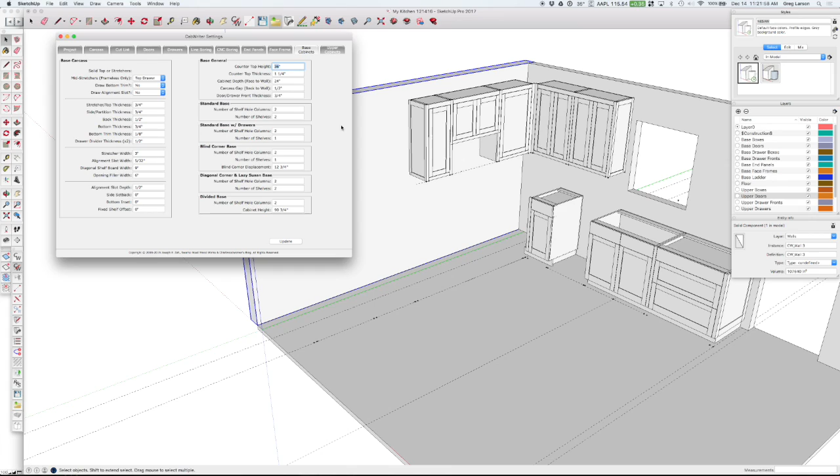I'm going to draw it as a base cabinet, and we're going to make it a bit higher. So let's make it like 48 inches tall, but we're only going to go 14 inches deep. So I've got a line 14 inches out here. Let me just draw a quick cabinet, and we're going to make this a left end panel, and this one we shall make a right end. Let's just make it a right end sheet for fun.

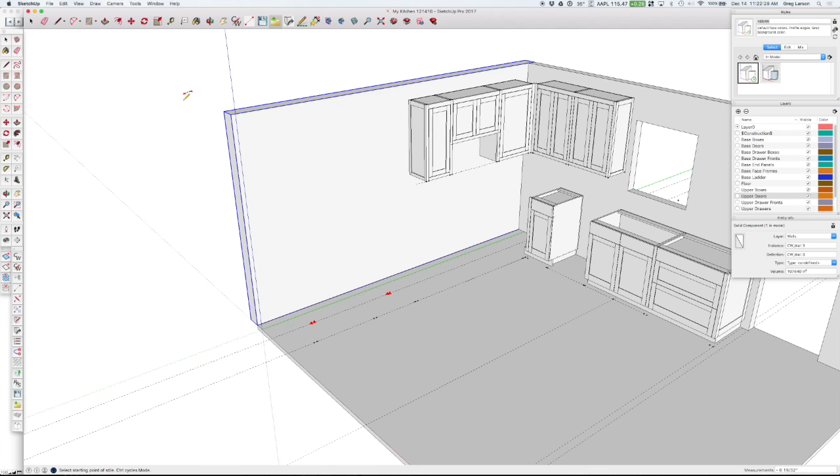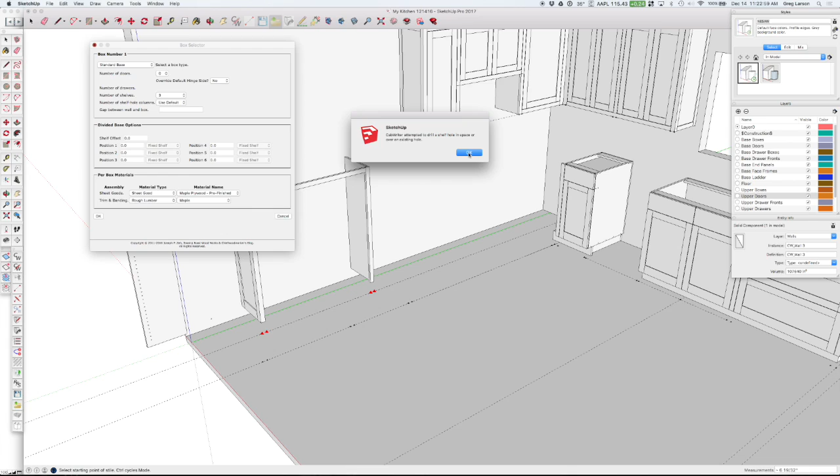So a piece of plywood, and so we'll create the cabinet. And I'm going to just do a standard base. I don't want any drawers or anything in there. Obviously no doors. And we'll use 3 shelves and the default shelf hole columns. And it's telling me I attempted to drill a shelf hole in space or over an existing hole. So I think I need to go look at my drilling tab.

I'm going to just undo that. Put my right end sheet back there. So let me go here, and we're doing line boring. If I look, my back row reference point for the line boring is off the front edge and 517 millimeters back. That's deeper than our cabinet. You can look at the drilling video if you want some more detail on this,

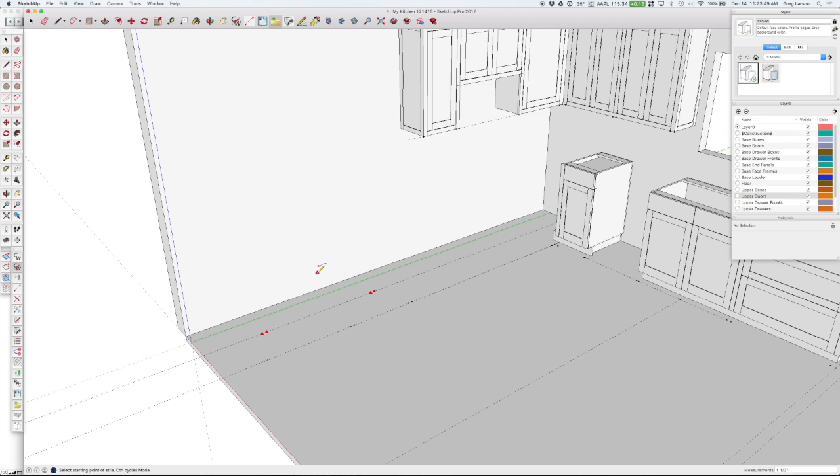but I'm going to go off the back 37 millimeters. That way, no matter how deep the cabinet is, I'll get a row of shelf pin holes at the front edge, 37 millimeters in, and 37 millimeters in from the back edge. So I shouldn't have a problem drawing it this time. Standard base, 3 shelves, no doors. All right. So there's a basic bookcase, and we notice we've got our shelves, we've got our shelf pin holes, and so on.

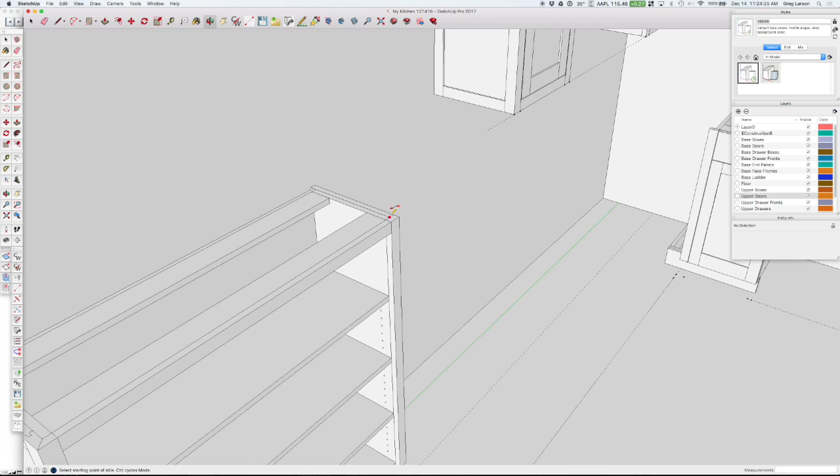But if you see here, my stile is lined up flush with my interior cabinet side. Normally I like that, especially if I'm putting drawer slides or hinges on, because that will allow me not to have to build out for those items. But on a bookcase where this is open, sometimes it can be really hard to line that up perfectly, and since it's always visible, you'll notice it. So what I like to do is put a 1/8 inch overhang of the stile to this cabinet side.

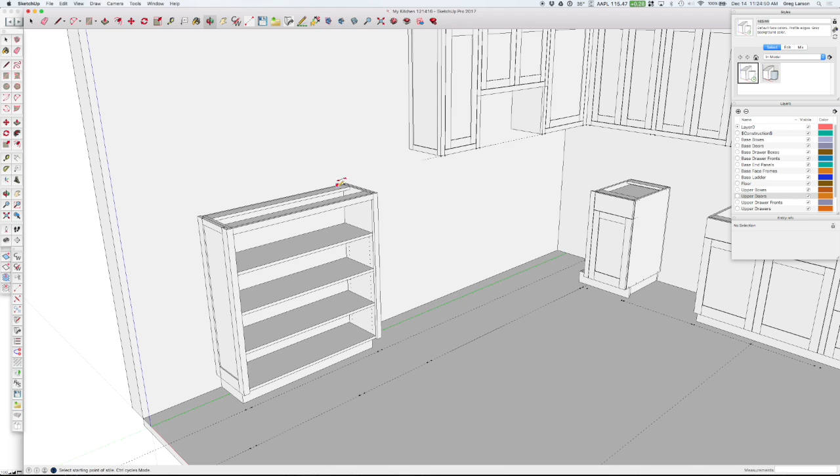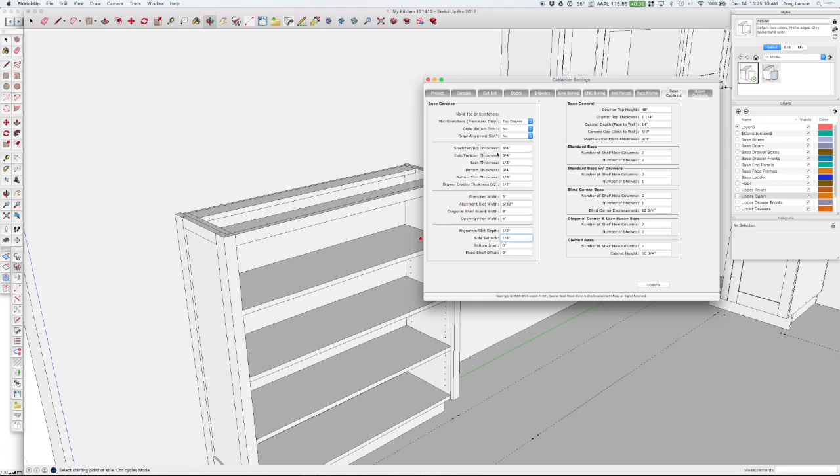So what do I need to do? I need to go into my settings. The first thing I want to look at is on base cabinets, the side setback. So what I want to do is set the side back 1/8 of an inch from the stile edge. So let me redraw that cabinet. So redraw the selected cabinets. No, do not use the stored defaults since I changed something. And if you look here, I do have an offset now. Here's the edge of the stile, and here's the cabinet side. That's 1/8 of an inch.

But you can see I got a different problem here. Since my side panel is still 13/16, and I've got a 1 9/16 front stile, that was enough. 3/4 of an inch here, 13/16 here. That added up to 1 9/16. That worked well when this was flush. Does not work so well now. So I either need to make my cabinet side thinner, but then I'd have to get 5/8 plywood, which I can do. I have a setting for that. But the easier thing would be just to make this end panel 1/8 inch thinner.

So I can go back into my settings. Under end panel, there is a setting here for frame thickness. So if it's a frame, I've got a setting, so I'm going to make that 11/16. And I've got the same problem over here with my sheet, but my sheet was only 3/4 of an inch. So now I got to use a 5/8 sheet there. So that could be a problem if I needed to get 5/8 plywood. That would probably be a frame and panel anyways, or another cabinet. But for illustration purposes, we'll see what this does for us.

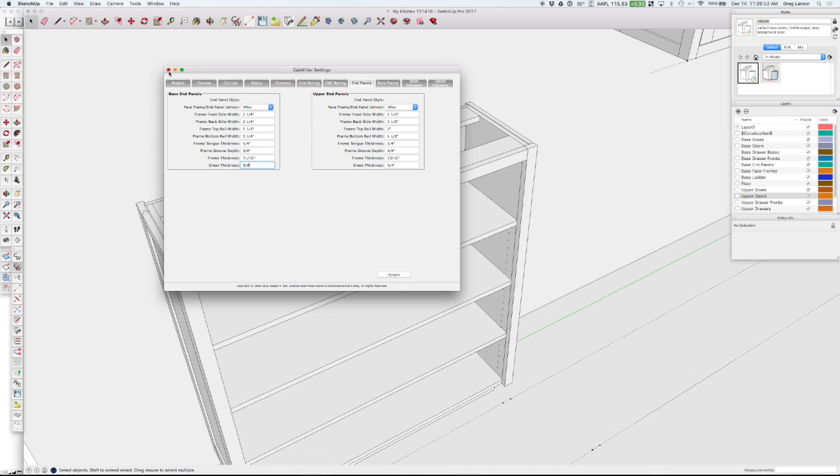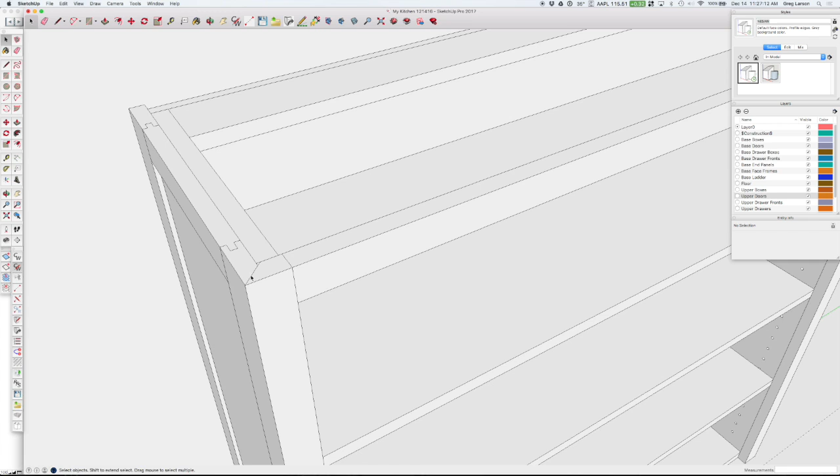So if I redraw this cabinet now, you'll notice that I don't have any overlapping here. I got a funny looking thing here in the corner, but that's not a big deal. I can still miter this corner together, and I get my 1/8 inch overlap, and over here I have a 5/8 piece of plywood, my 3/4 inch interior piece, and I've got a 1/8 inch overhang, which makes for a nice finished look on there.

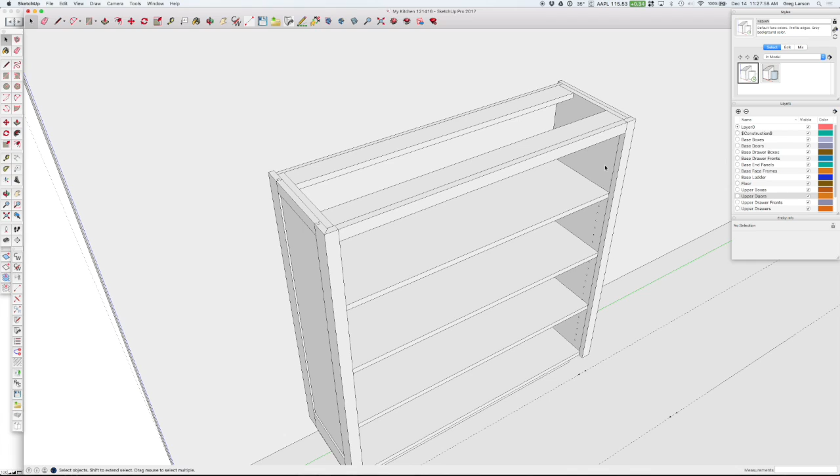If you build your cabinets not flushed up like this, this is the setting that you would use. My other choice here is to make the stile wider. I could have left that at the full width and just made my stile 1/8 inch wider, but I like the narrower stile. So if you build your cabinets with these not flushed up, you would choose the appropriate width of your stile, the appropriate thickness of your plywood on the interior, and the setback that you wanted. So it wouldn't be 0, it would be something greater than 0. And that's all there is to using the side offset and the end panel stile thickness parameters.